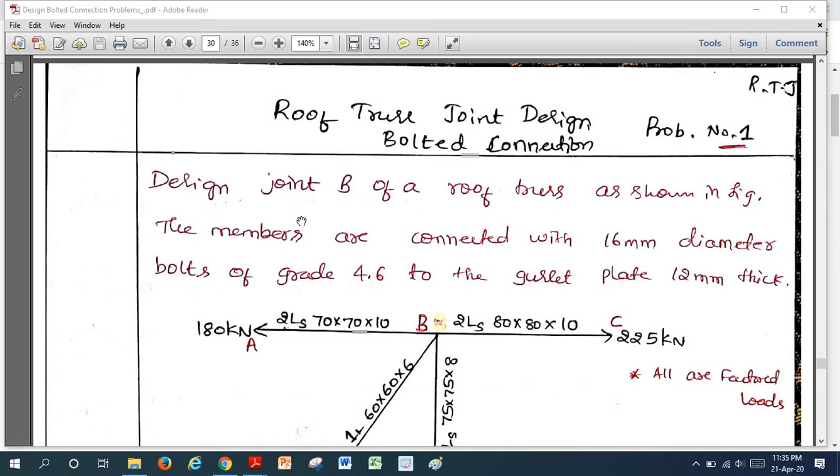Welcome back. Today we're going to discuss roof truss joint design, the bolted connection.

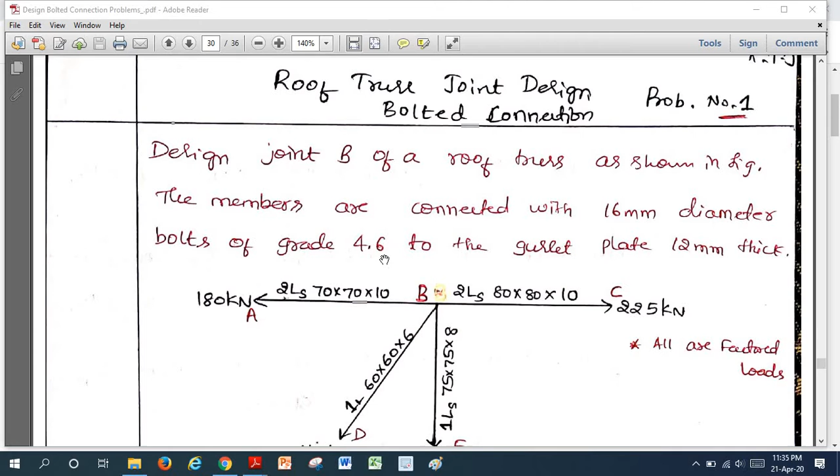Problem number 1. Here is the problem statement: design joint B of a roof truss as shown in figure. The members are connected with 16 mm diameter bolts of grade 4.6 to the gusset plate 12 mm thick. This is the joint configuration given, this is joint B. Towards A, along this line member 180 kN force is acting, along BC 225, along BE 75, BD 110 kN.

Here they have used double angle sections: 2 leg 70 into 70 into 10 mm, 80 into 80 into 10, 60 into 60 into 6. This one is single angle, these two are double angles. Here again single angle, 75 into 75 into 8. All the units are in millimeter here.

So now we know what roof truss is. This is the example for roof truss.

If you take here, we are designing this portion. Assume you are designing this portion, this is double angle, used on top and at the bottom also - we call these angles. We are designing this, that is, the number of bolts required to transfer the load from joint B towards another member. This is the problem: to transfer 180 kN, the angle to a double angle is provided, how many bolts do we need to provide? Like that we need to calculate for all the members.

The number of bolts, pitch and resistance - here all are factored loads.

Here the gusset plate - what is it? If you see the gusset plate, this plate is called gusset plate, this one view, this other view. So on the gusset plate all the members will come and rest. This is actually a double angle section, single bolted, connected back to back.

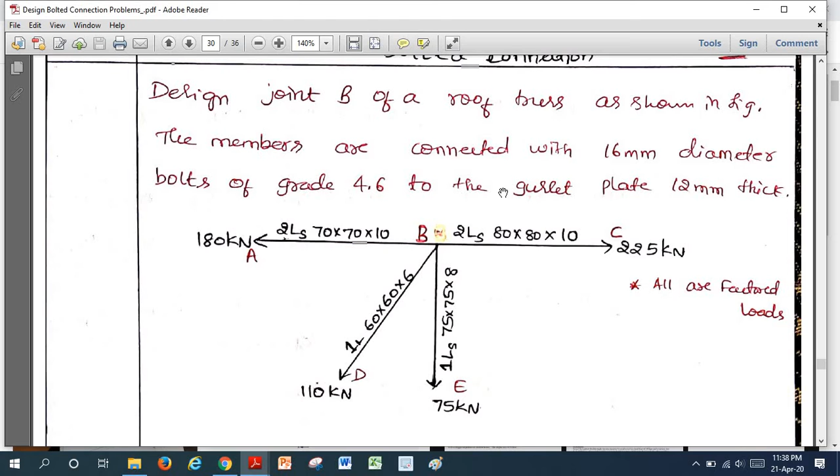Now to design this we should know the bolt value first - we know how to calculate the bolt value. The given data here is 16 mm dia bolt, so diameter of the bolt hole is 16 plus 2 equals 18 millimeter, FU of bolt 400 Newton per millimeter square, FU of plate 410 Newton per millimeter square. Since it's not given, I am assuming that. Gamma MB we should take as 1.25 per table number 5.

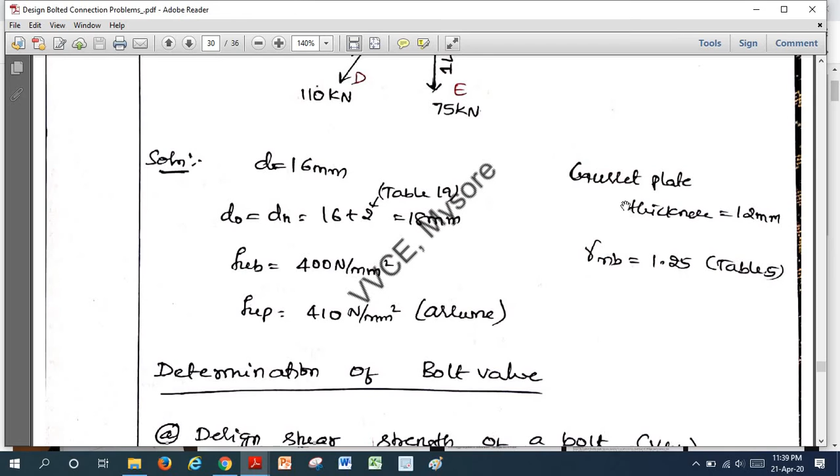Gusset plate thickness - this is a common plate where all the angles will go and rest. We are not going to connect any member one above the other, that is angle one above the other. The angles will go to rest on the gusset plate like this. We need to place them on the gusset plate, not one above the other. This is also an example of gusset plate - the angle will go to rest on gusset plate. This plate we call gusset plate. This also rests on gusset plate.

So here the gusset plate thickness in our case is 12 millimeter. We are not going to place one angle above the other. We should give the gap and connect the angle to the gusset plate, not one angle to another angle. We should know this thing.

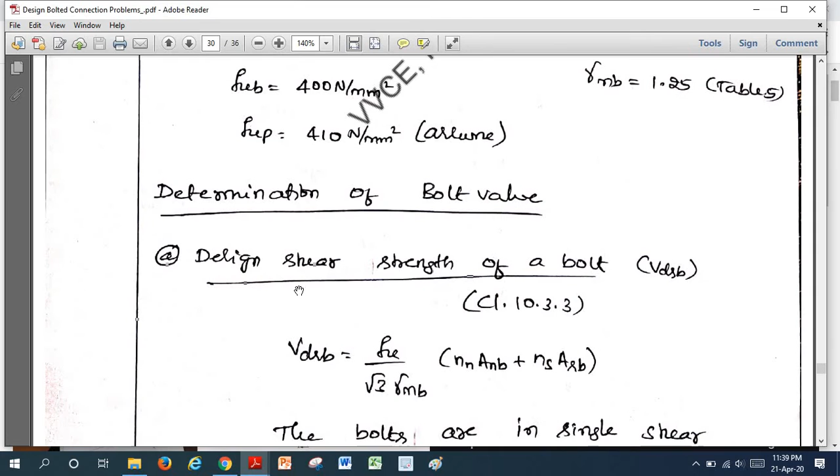Now if you calculate the bolt value, we should calculate shear strength, and we should also calculate bearing strength. If we come to shear strength, the bolts are in single shear. Assume thread fall in shear plane.

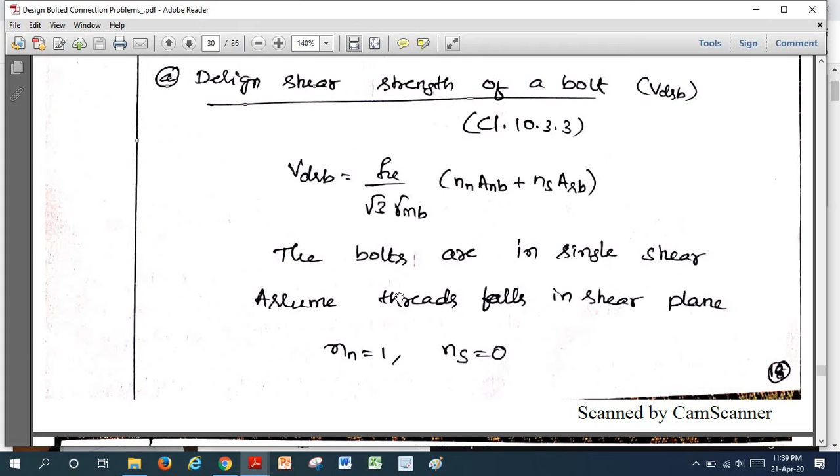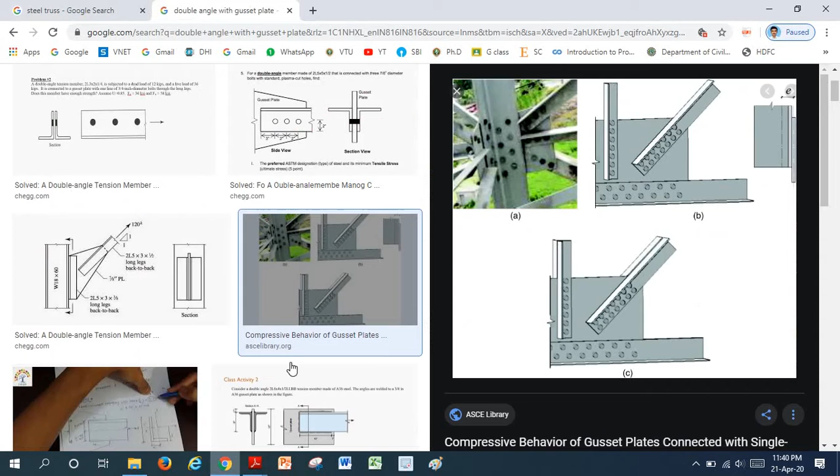If you consider a single angle section where one plate and one angle will be there, there will be two elements, so there will be single shear. Here in these two cases there will be single shear. Here there will be double angle gusset plate, meaning three steel elements were there, 1, 2, 3 elements.

In case of double angle, the bolt will break into 3 pieces, therefore there will be 2 shear planes. Here in case of single angle, this angle will not be there, only one gusset plate angle. The bolt will break into two pieces since there are two elements, one shear plane.

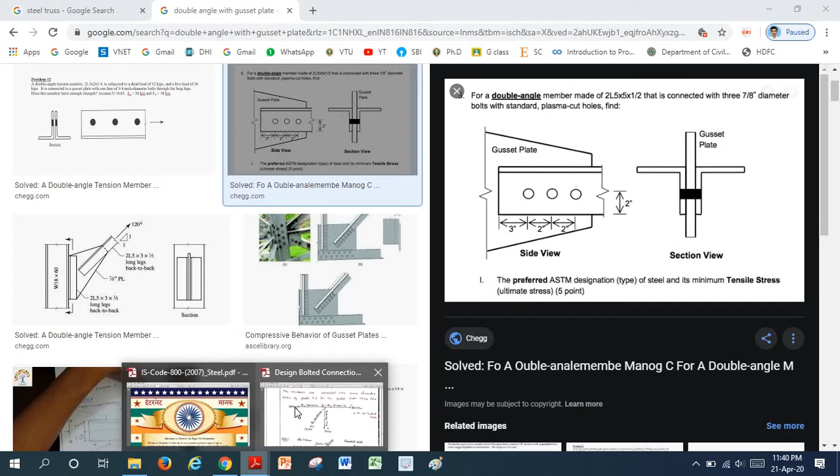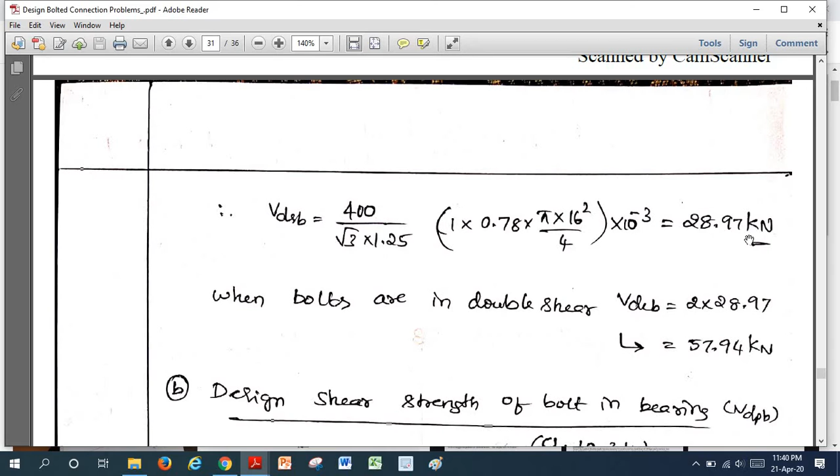So for single shear we should calculate separately, and for double shear we should calculate separately. I have assumed thread falls in shear plane, nn equal to 1, ns equal to 0. If you calculate, you get 28.97 kilonewton. This is for single shear.

When the bolts are in double shear, for double angle section, Vdsb becomes twice of this, that is 2 into 28.97 kilonewton, which comes out to be 57.94 kilonewton. This is the shear strength of a single bolt in double shear for double angle section.

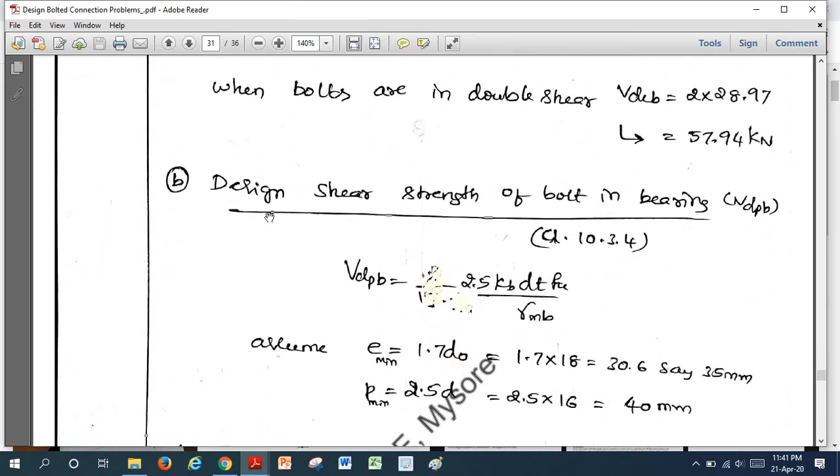This is the shear capacity of the bolt for single angle section connected to gusset plate for single shear. Now if you go for bearing strength, this is the formula.

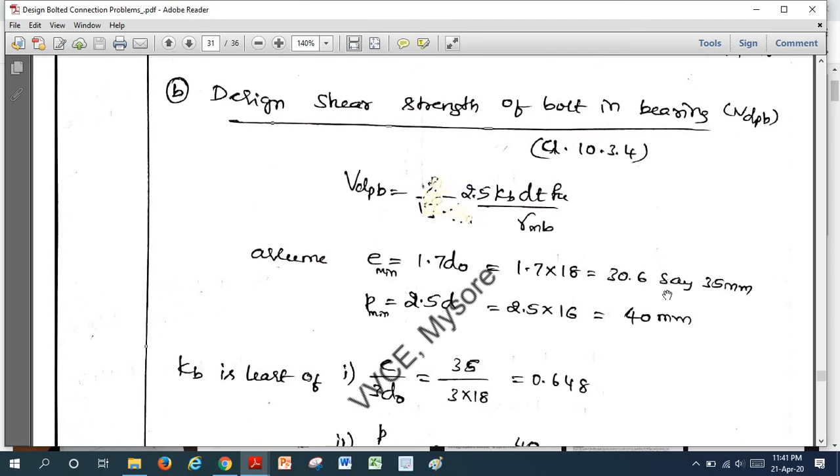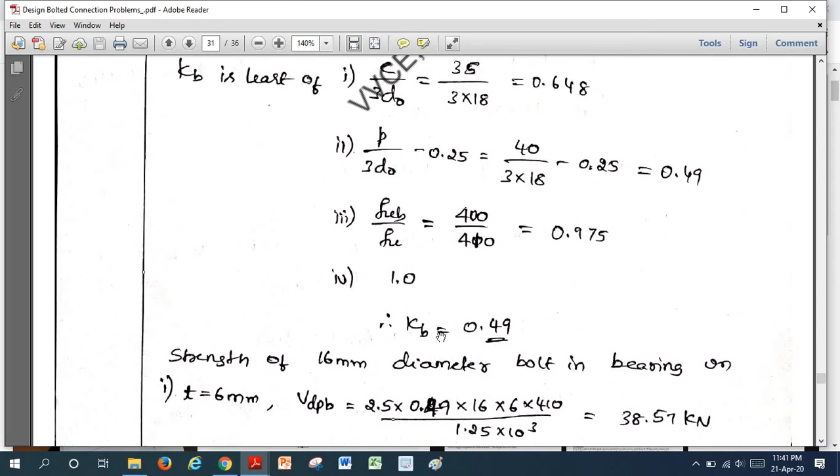So here I assumed e as 1.7 times of D naught as per code. 1.7 into D naught gives 30.6, I assumed as 35 millimeter. P minimum 2.5 into D, I assumed as 40 millimeter here. If you calculate the Kb value out of this, whichever is least, that is the Kb value, 0.49.

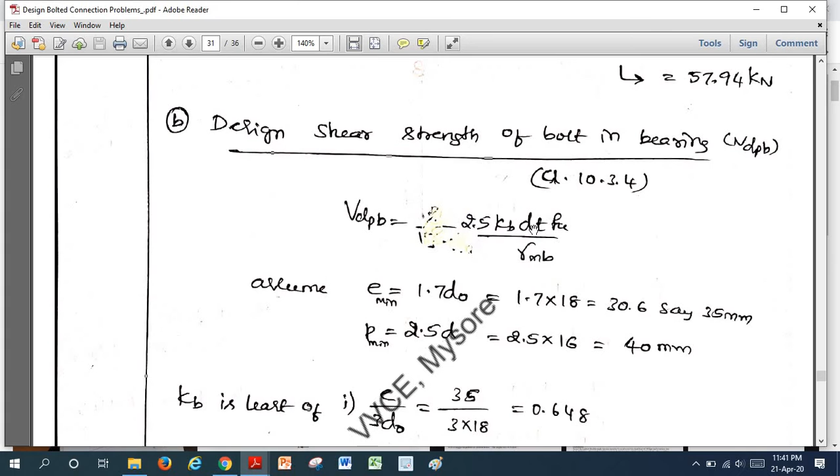Now the question is which t we need to substitute. If it is single angle section, for single shear, we should consider the least plate thickness, that is the angle thickness or gusset plate thickness. Here the gusset plate thickness is 12 millimeter, and the angle thicknesses vary here.

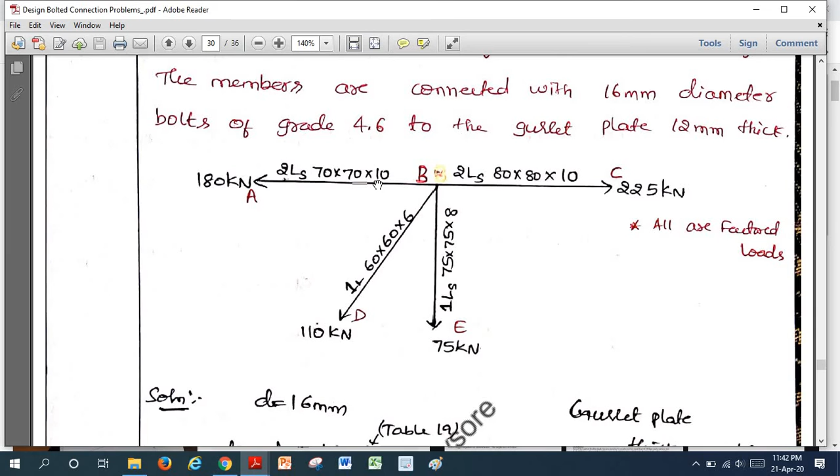If you look into this problem, angle thickness for this element is 8mm, for this one is 6mm, for this one is 10mm on one side and 10mm on another side. Here also 10mm on one side, 10mm on another side. Therefore we should take the t value carefully.

Here we calculate the strength of 16mm bolt in bearing. If t is 6mm for single angle, VDP becomes based on 6, the least plate thickness. Since the gusset plate is 12mm and the angle section thickness is 6mm, we should take 6, giving 38.57 kilonewton.

Here if t is 8mm for another single angle, VDP becomes 51.43, using 8mm thickness, since the gusset plate is 12mm we should use the least value.

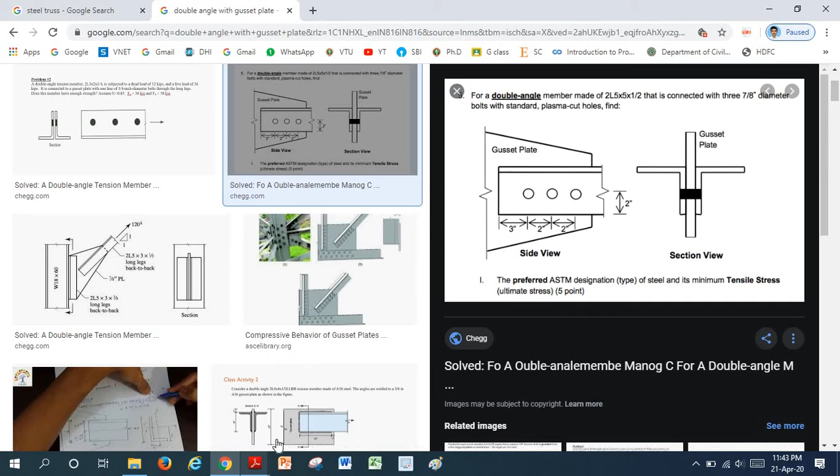If thickness is 12mm for the gusset plate, and we consider double angle section, the thickness becomes 10 plus 10, that is 20. This is 12, therefore we should use 12mm thick plate, 12mm in our case. Therefore this becomes 2.5 kb D t, using 12.

Sum of angle section thickness, like sum of cover plates we took in the butt joint, here we take sum of cover plate, the angle thickness or gusset plate, whichever is least. Therefore here we have taken gusset plate thickness, that becomes 12 millimeter. So therefore we are getting 77.14 kilonewton.

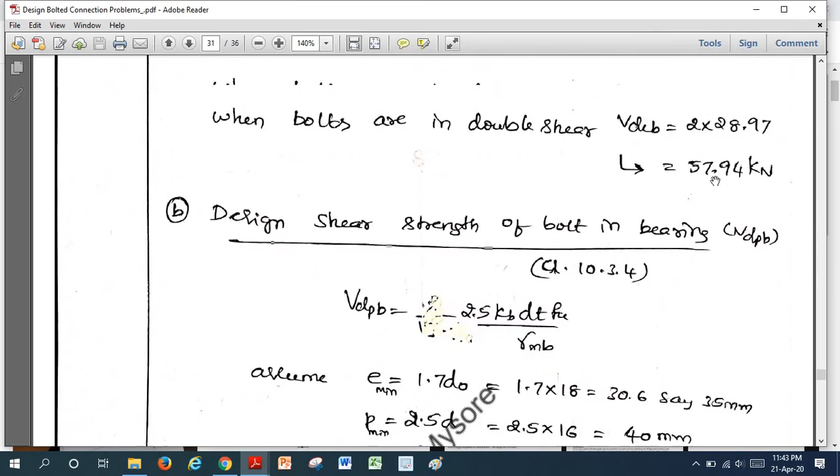Now, this is what the bearing strength for different angle sections or different members looks like. And here this is what shear strength for bolts is.

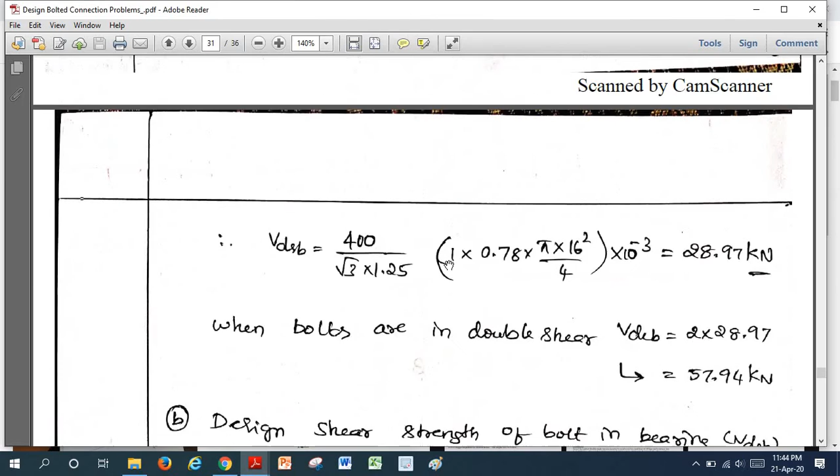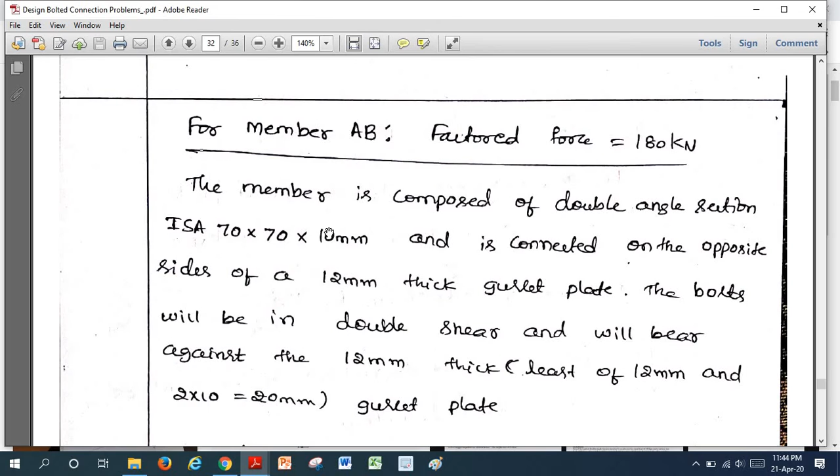Now if you design for member AB, the factored force given in the problem is 180 kilonewton along member BA or AB. We are designing that to bear 180 kilonewton, how many bolts are required. Number of bolts required formula is factored force divided by bolt value. Bolt value is the least value of the bolt strength in shear and bearing.

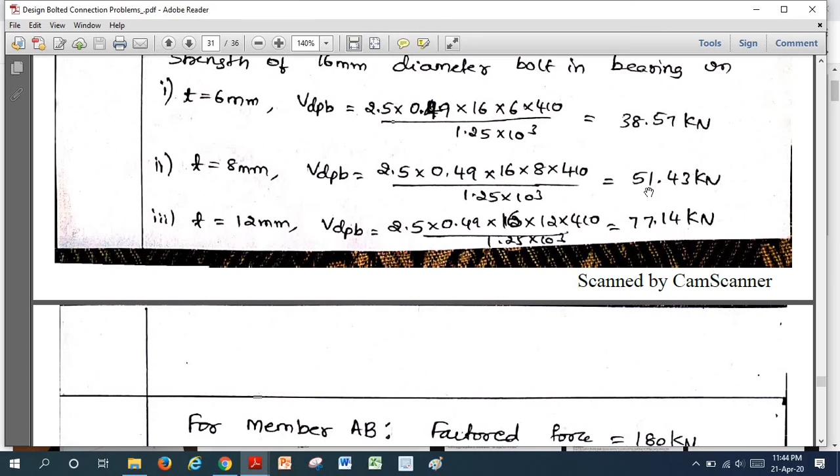First we need to check whether our selected member is subject to single shear or double shear. AB member consists of two ISA double angle section, that falls under double shear case. Therefore for double shear case we should take the strength carefully and compare it with the shear strength, and whichever is least we should consider.

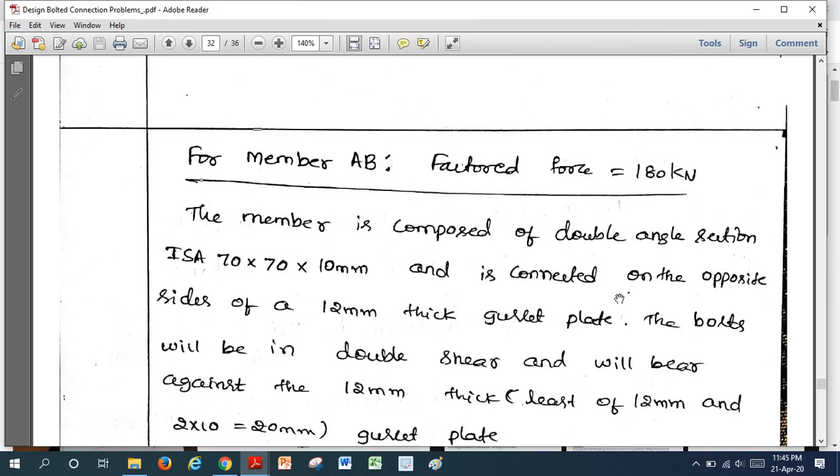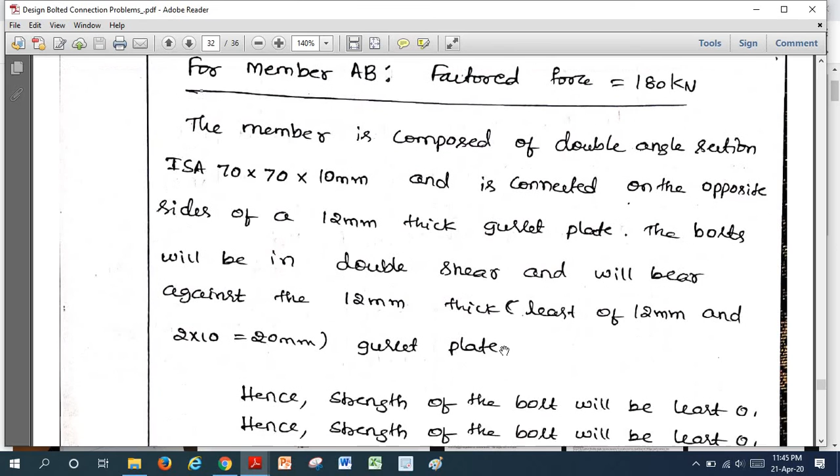Now the member is composed of double angle section and is connected on opposite sides of a gusset plate 12 mm thick. The bolts will be in double shear and will bear against the 12 mm thick gusset plate, that is 12 mm and 20 mm, I have discussed already. Now strength of the bolt will be the least of this value.

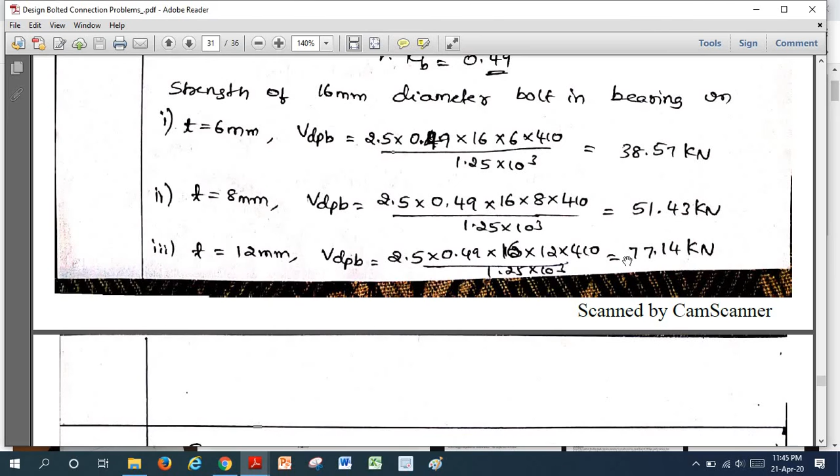For double angle section with 12 mm thickness of gusset plate, bearing value is 77.14, I should compare with the shear strength, 57.94 for double shear. Out of which 57.94 is the least value, therefore the bolt value becomes 57.94. Now we can calculate number of bolts required as factored force divided by 57.94, that becomes 3.10, say 4 numbers.

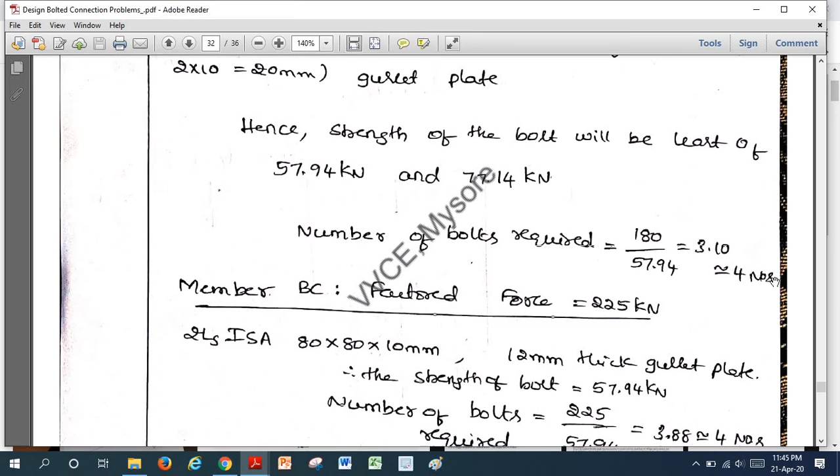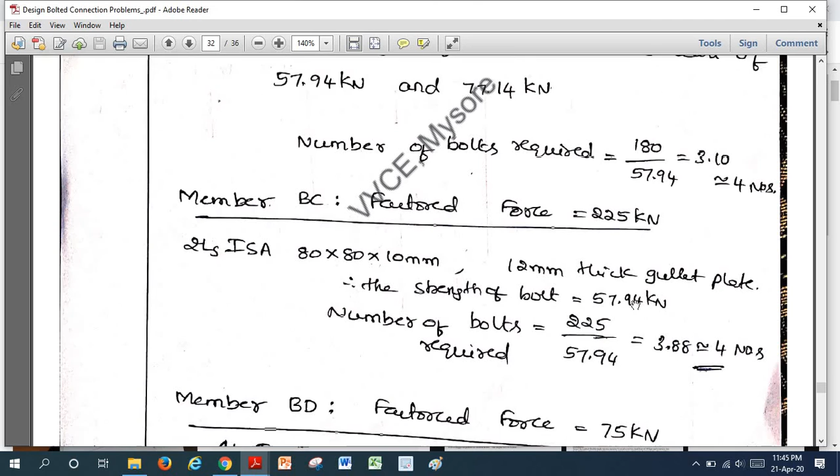Likewise we should calculate for member BC. Here the member is double angle section, it will become subject to double shear. In the same case, the bolt value becomes 57.94. Number of bolts required is 3.88, so 4 numbers.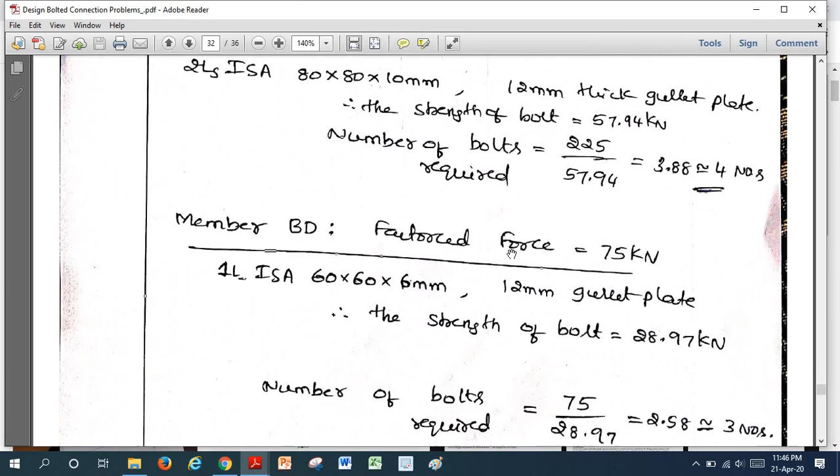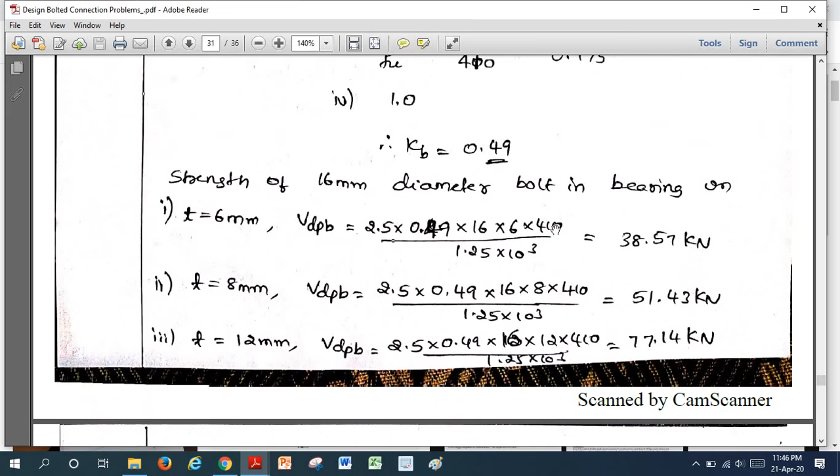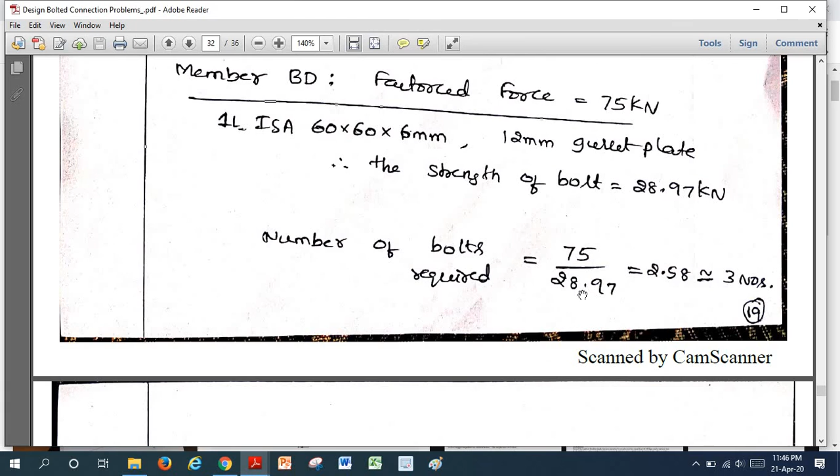Now for member BD, it is a single angle section, so this is subject to single shear. For single shear we know the value 28.97, that becomes the bolt value, for single shear value of thickness 6 mm angle section. Bearing strength is 38, shear strength is 28, out of which 28 is the least value, therefore we should take 28.97 kilonewton. Calculate the number of bolts required, that comes out to be 3 numbers.

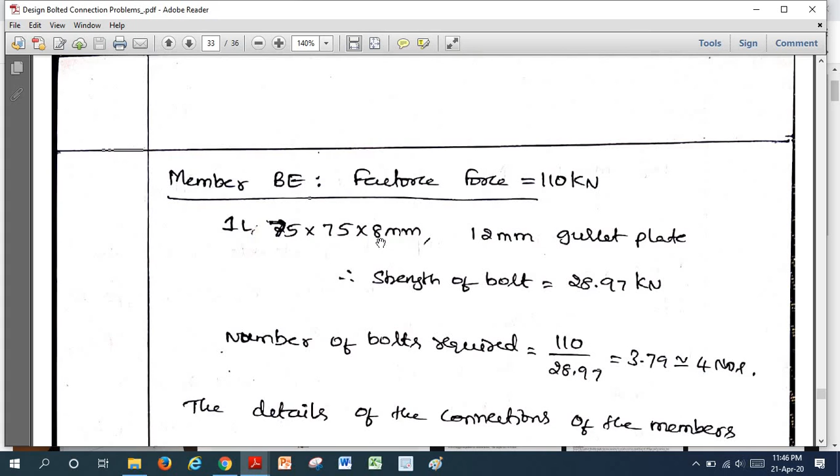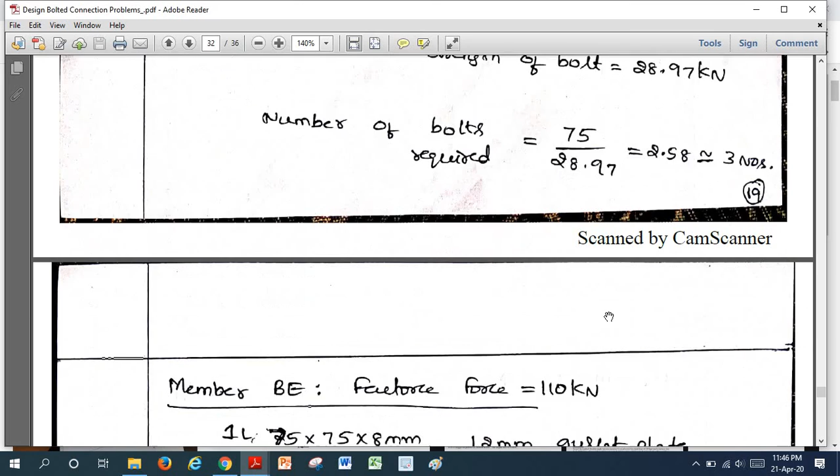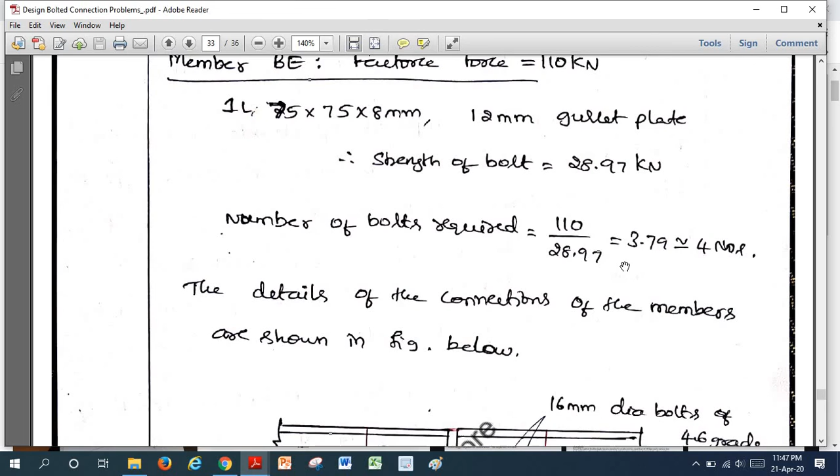Now for member BE, this is a single angle section. For 8 mm thickness, shear strength is 28.97, bearing strength here is 51.43, therefore the least value is 28.97, that becomes the bolt value. Therefore we can calculate number of bolts required, 110 divided by 28.97 equals 3.79, say 4 numbers. Here we need to round it off to the nearest whole number.

Now if you write the connection detailing part here, we should write the gusset plate, then we should write the angles like this. This is one leg, this is the other leg; this is one leg, this is the other leg of the angle. One leg is connected to the gusset plate, the other leg is free.

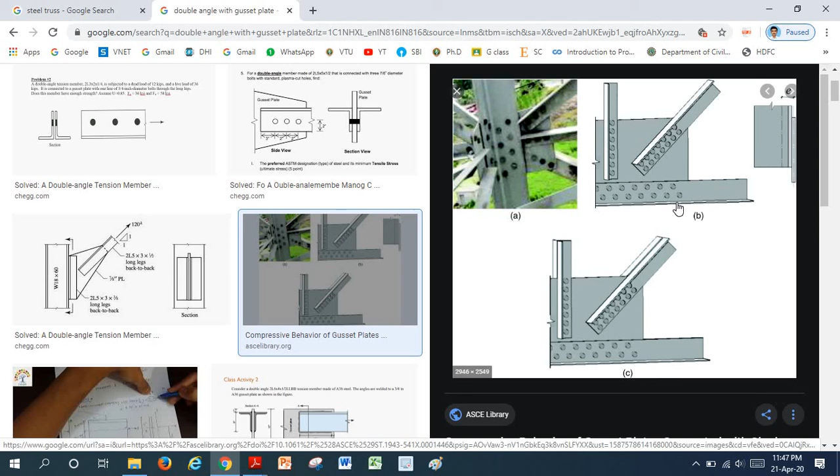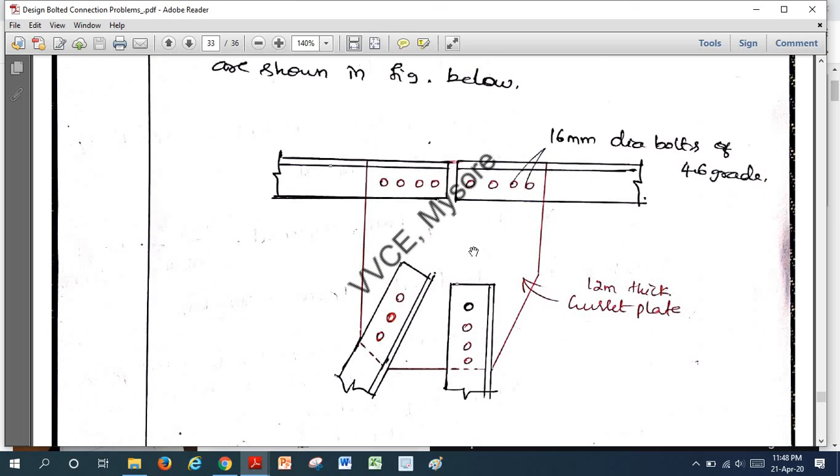Here we should carefully calculate the bolt value first. If we calculate the bolt value, automatically we can calculate the number of bolts required, and the pitch and edge distance. Thank you.